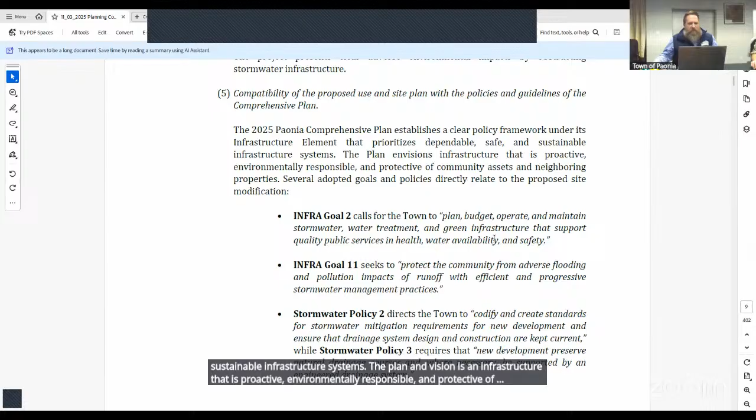Number 5, compatibility of the proposed use and site plan with the policies and guidelines of the comprehensive plan. The 2025 Paonia Comprehensive Plan establishes a clear policy framework under its infrastructure element that prioritizes dependable, safe, sustainable infrastructure systems. The plan envisions an infrastructure that is proactive, environmentally responsible, and protective of community assets and neighboring properties. Several adopted goals and policies directly relate to the proposed site modification.

Infrastructure Goal 2 calls for the town to plan, budget, operate, and maintain stormwater, water treatment, and green infrastructure and support quality public services and health, water availability, and safety. Infrastructure Goal number 11 seeks to protect the community from adverse flooding and pollution impacts of runoff with efficient and progressive stormwater management practices. Stormwater Policy 2 directs the town to codify and create standards for stormwater mitigation requirements for new development and ensure that drainage system design and construction are kept current.

While Stormwater Policy 3 requires that new development preserve natural drainage courses and, where necessary, be supported by an engineered drainage system. The proposed driveway and parking pad would obstruct an engineered bioswale that functions as a shared stormwater management feature, directly conflicting with the plan's commitment to resilient, environmentally sound infrastructure. By disrupting natural and engineered drainage pathways, the project undermines the town's stormwater goals of reducing pollutant discharge, preventing flooding, and coordinating with regional partners such as Delta County and local ditch companies.

Furthermore, the comprehensive plan's infrastructure vision promotes proactive maintenance, preservation of public safety, and design consistency within established residential areas. The introduction of non-engineered private improvements within a shared drainage easement is incompatible with the plan's guiding principles of equitable infrastructure stewardship and neighborhood scale resilience. The proposed project does not align with the 2025 comprehensive plan's infrastructure, stormwater, and land use goals. It compromises established drainage systems, contradicts stormwater management policies, and fails to uphold the town's long-term vision for safe, sustainable, and well-coordinated infrastructure.

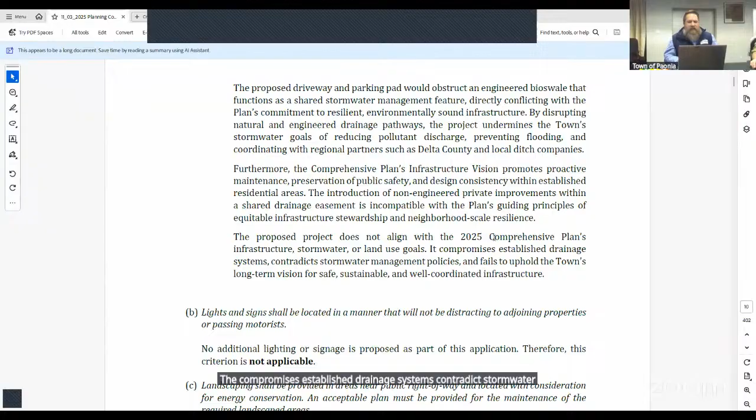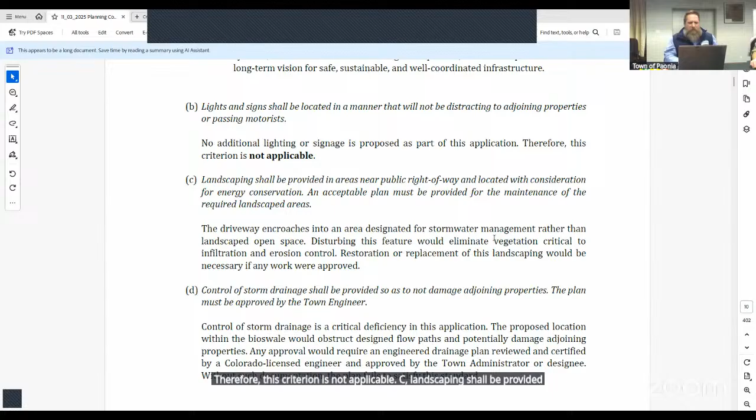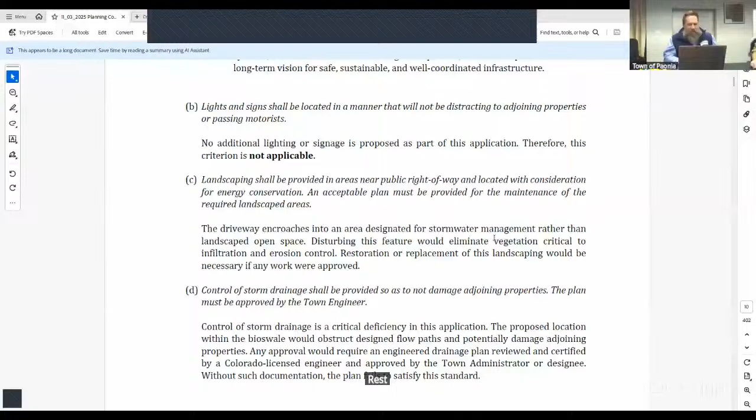Lights and signs shall be located in a manner that will not be distracting to adjoining properties or motorists. No additional lighting or signage is proposed as part of this application. Therefore, this criterion is not applicable. C, landscaping shall be provided in areas near public right-of-way and located with consideration for energy conservation. An acceptable plan must be provided for the maintenance of required landscaped areas. The driveway encroaches into an area designated for stormwater management rather than as landscaped open space. Disturbing this feature would eliminate vegetation critical to infiltration and erosion control. Restoration or replacement of this landscaping would be necessary if any work were approved.

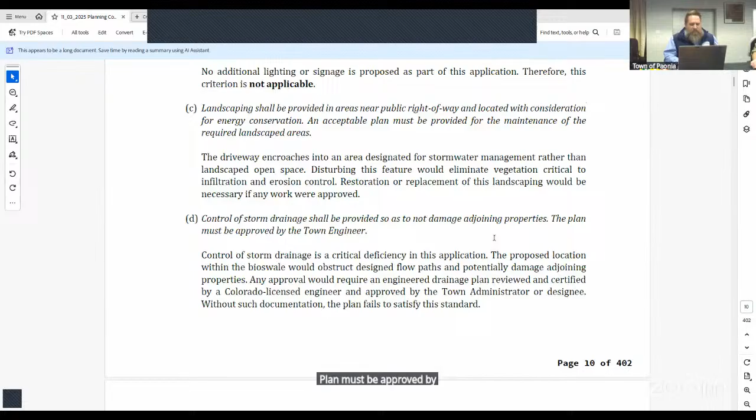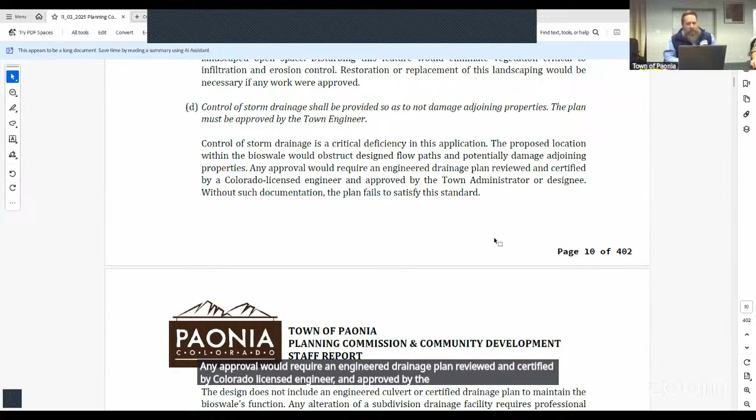D, control of storm drainage shall be provided so as to not damage adjoining properties. The plan must be approved by the town engineer. Control of storm drainage is a critical deficiency in this application. The proposed location within the bioswale would obstruct designed flow paths and potentially damage adjoining properties. Any approval would require an engineered drainage plan reviewed and certified by a Colorado licensed engineer and approved by the town administrator or designee. Without such documentation, the plan fails to satisfy the standards.

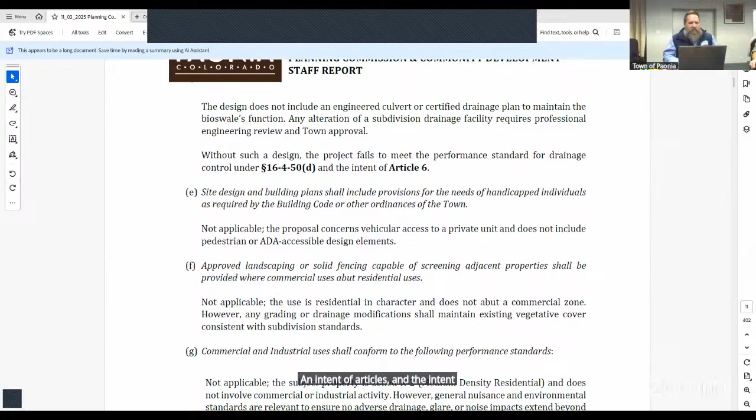The design does not include an engineered culvert or certified drainage plan to maintain the bioswale's function. Any alteration of a subdivision drainage facility requires professional engineering review and town approval. Without such a design, the project fails to meet the performance standard for drainage control under section 16-4-50(d) and the intent of Article 6. Site design and building plans shall include provisions for the needs of handicapped individuals as required by the building code or other ordinance of the town. This is not applicable. The proposal concerns vehicular access to a private unit and does not include pedestrian or ADA accessible design elements.

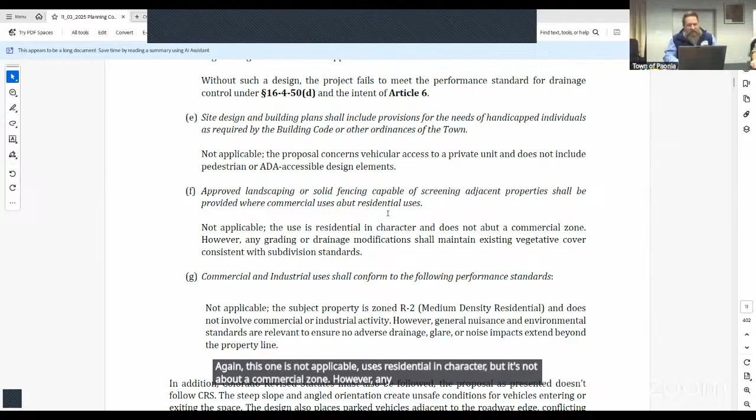Approved landscaping or solid fencing capable of screening adjacent properties shall be provided where commercial uses abut residential uses. Again, this one is not applicable. Use is residential in character, but it's not about a commercial zone. However, any grading or drainage modifications shall maintain existing vegetative cover consistent with subdivision standards. G, commercial industrial uses shall conform to the following performance standards. All of these were not applicable.

The subject property is zoned R2, medium density residential. It does not involve commercial or industrial activity. However, general nuisance and environmental standards are relevant to ensure no adverse drainage, glare, or noise impacts extend beyond the property. In addition, Colorado Revised Statutes must also be followed. The proposal as presented doesn't follow CRS. The steep slope and angled orientation create unsafe conditions for vehicles entering or exiting the space.

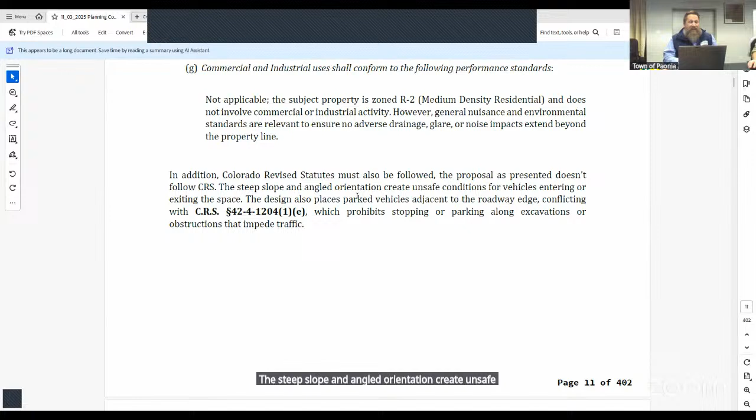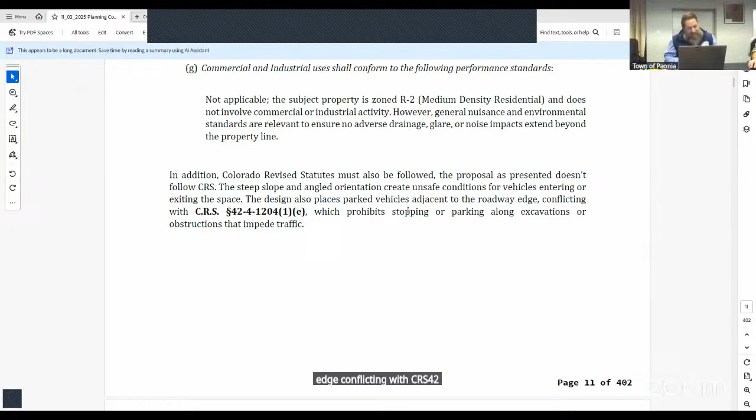The design also places parked vehicles adjacent to the roadway edge, conflicting with CRS 42-4-1204(1)(e), which prohibits stopping or parking along excavations or obstructions that impede traffic. This is a summary of the findings.

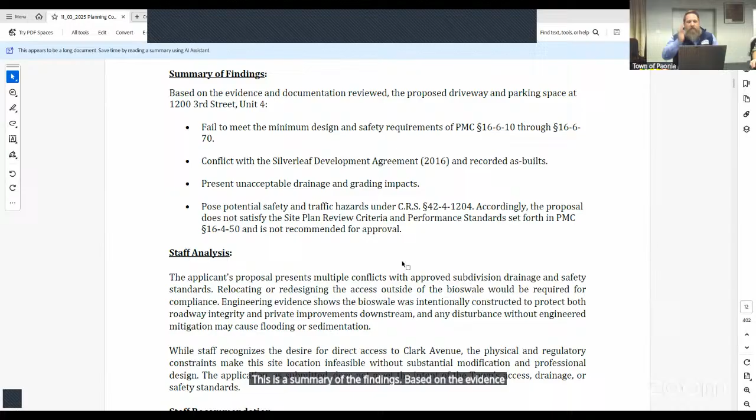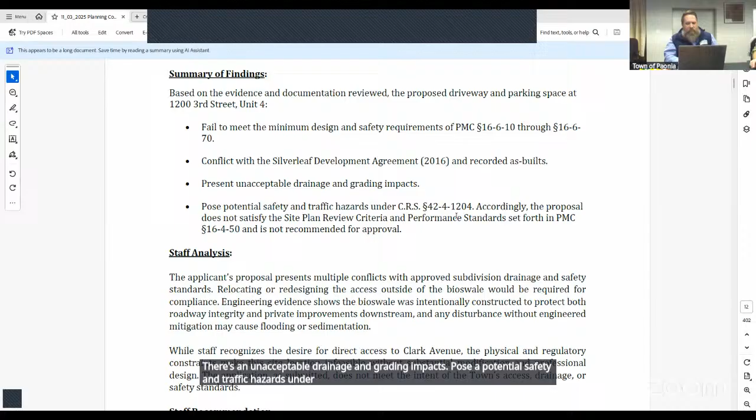Based on the evidence and documentation reviewed, the proposed driveway and parking space at 1200 3rd Street, Unit 4, failed to meet the minimum design and safety requirements of PMC Section 16610 to Section 16670, conflict with the Silverleaf Development Agreement and recorded as-builts, present unacceptable drainage and grading impacts, and pose potential safety and traffic hazards under CRS 42-4-1204. Accordingly, the proposal does not satisfy the site plan review criteria and performance standards set forth in PMC Section 16450 and is not recommended for approval.

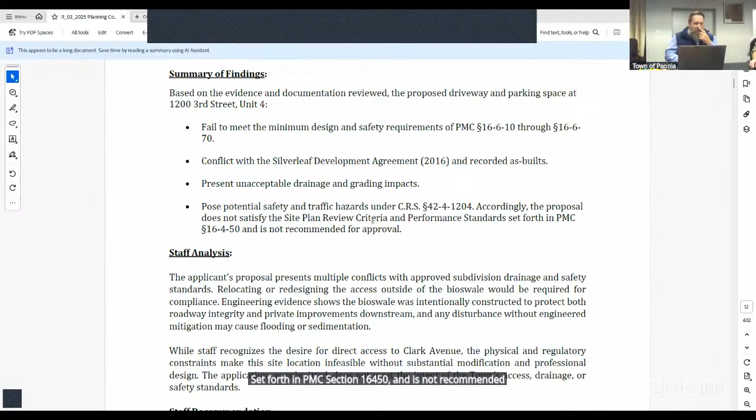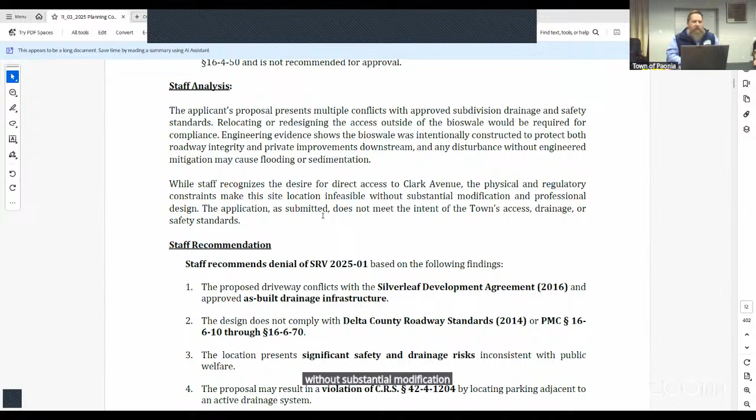Staff analysis. The applicant's proposal presents multiple conflicts with approved subdivision drainage and safety standards. Relocating or redesigning the access outside of the bioswale would be required for compliance. Engineering evidence shows the bioswale was intentionally constructed to protect both roadway integrity and private improvements downstream, and any disturbance without engineered mitigation may cause flooding or sedimentation. While staff recognizes the desire for direct access to Clark Avenue, the physical and regulatory constraints make the site location infeasible without substantial modification and professional design. The application as submitted does not meet the intent of the town's access, drainage, or safety standards.

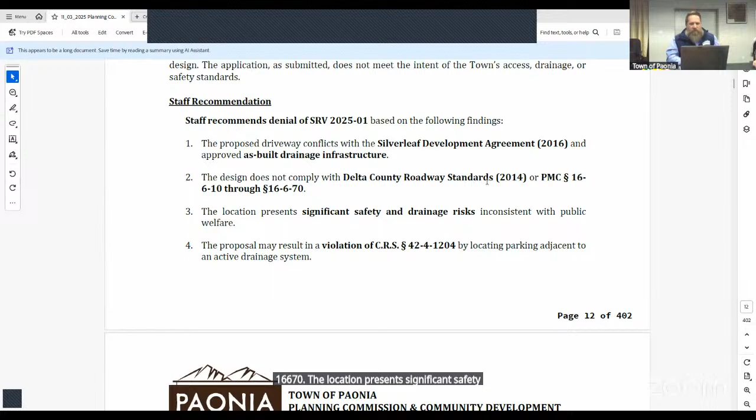So we have two recommendations here. Staff recommends denial of SRV 2025-01 based on the following findings. The proposed driveway conflicts with Silverleaf Development Agreement 2016 and approved as-built drainage infrastructure. The design does not comply with Delta County Roadway Standards or PMC Section 16-6-10 through 16-6-70. The location presents significant safety and drainage risks inconsistent with public welfare, and the proposal may result in a violation of CRS 42-4-1204 by locating parking adjacent to an active drainage system.

We do offer an alternative or conditional approval if granted by this commission. If the planning commission determines the request may proceed, staff recommends conditional approval subject to the following minimum requirements. One, an engineer's design. A licensed Colorado engineer shall prepare drainage and access plans, verifying that stormwater capacity and roadway safety are maintained. Two, culvert installation. The engineer shall design and size a culvert adequate to preserve the bioswale's function. Three, perpendicular alignment. The driveway must be realigned to intersect Clark Avenue at a perpendicular angle.

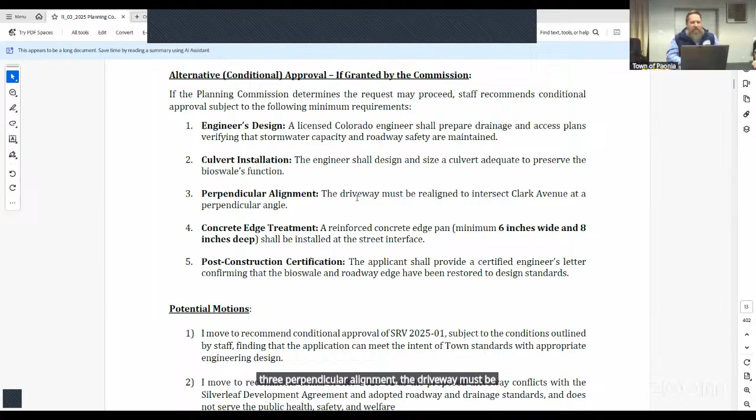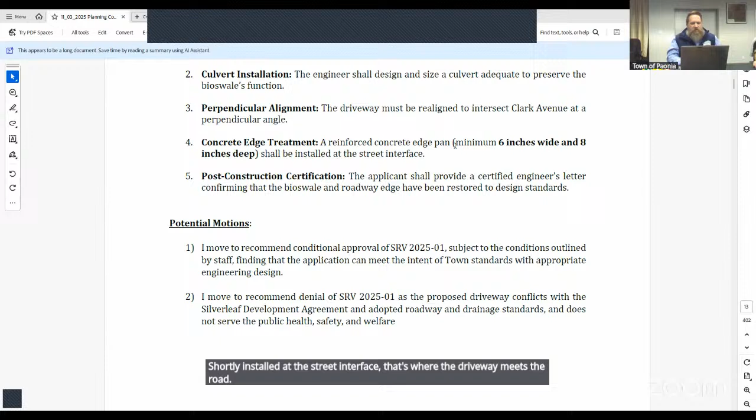Number four, concrete edge treatment. A reinforced concrete edge pan, minimum of 6 inches wide and 8 inches deep, shall be installed at the street interface. That's where the driveway meets the road. Five, post-construction certification. The applicant shall provide a certified engineer's letter confirming that the bioswale and roadway edge have been restored to design standards. And then there are two potential motions. That's it. Okay. Staff report. Are there any other comments? Obviously not.

Okay, the applicant presentation. Would the applicant or the applicant's representative please come up to the podium and state your name and address for the record and take the oath? Okay, good evening, everyone. Wait a minute. Do you swear to tell the truth in this matter? I do. All right. Continue.

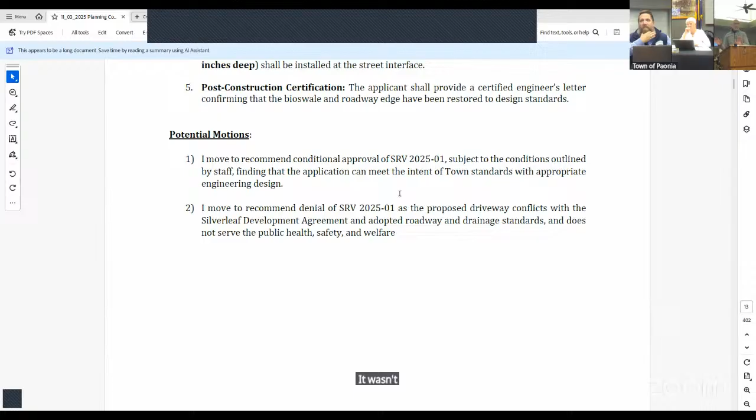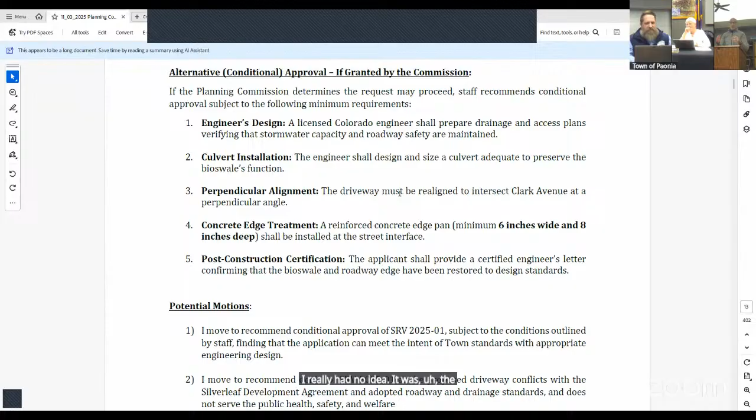Good evening. Let me say to begin with, it wasn't my intent to be such a scofflaw in all this. I really had no idea that the proposal was so completely out of compliance, and I acknowledge that it is, so I apologize for taking your time with that. What I do want you to know is that I've retained Jeff Rupert, who was the engineer who did the civil design work for it all. And I met with him this afternoon, and he's prepared to do a proper design that would meet the alternative path that has been outlined here.

So I don't want to try to defend the original proposal at all. I recognize it was inadequate and inappropriate, and that a proper engineered proposal needs to be done. And I'd like to ask for the opportunity to do that. So that's really all I have to say. Okay. Anything from town staff? Is this the rebuttal?

Yeah. Okay, yes, that was the information why Commissioner Hunter couldn't be here. She's had to recuse herself after her husband was retained, which is completely understandable. And it would make sense that if this were the path to go and this alternative conditional approval were to be considered tonight, one of the motions could be to, what's the word I'm looking for, Ruben? Table? Not table, because you can't table this. Conditional? No.

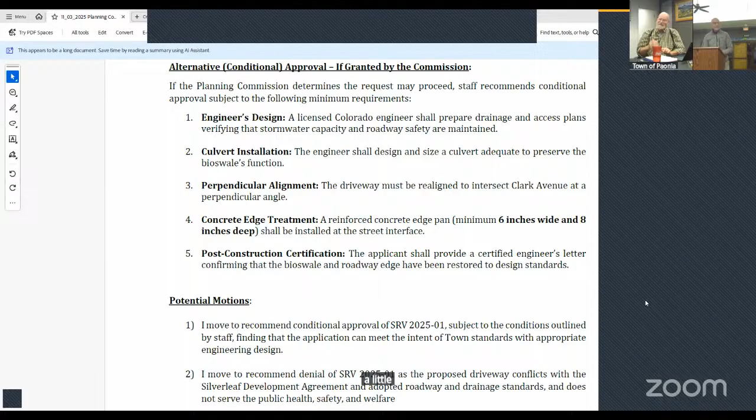be rushed. One of the things, unfortunately, I have a little knowledge just because I've lived here, and there are utilities in that swale. That's right. So I forgot public comment. So we need to do public comment. I jumped. So utilities have actually been marked. They're marked right now, for a different reason. But you're absolutely right. There are utilities.

Okay, well, I'm gonna ask you to sit down and we're gonna take public comment. Thank you. All right, I will now open the public comment portion of the public hearing. Any speakers, please clearly state your full name and address for the record, speak from the podium, and wait to talk until you get sworn in. Does anybody want to make a comment? Yes, sir. Reed Hunker. I'm in unit number 3, right next door to the north. Okay. Can you swear to tell the truth in this matter? Absolutely, yes.

Everything that was mentioned here answered my questions. So I really don't have any other comments other than we were thinking about possibly expanding the existing 2-car guest parking where it's flat, right outside of unit 3. We're thinking about adding one more to the right of that, so that would be 3 guest parking places there, and then have a crusher fine path going to 4.

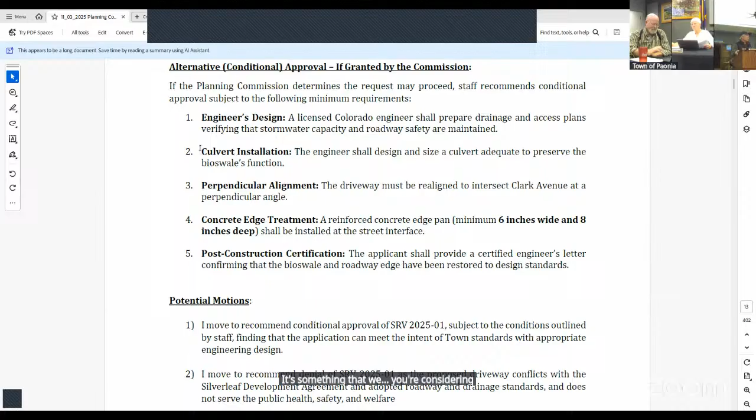Something that we're considering providing as a board, because parking is at a premium, as we know. But those would be all grouped together. And that's basically it. Thank you very much. Anyone else like to make a comment? Okay, seeing none, I will now close the public comment portion of this hearing. All right.

Before we turn to the commissioner questions and deliberation, I want to state that the documents included as part of the record for this public hearing include all the application materials submitted by the applicant, all materials included in the packet, all written referral and public comments received during the application, the notice of hearings, and the town's ordinances, as well as Colorado revised statute and the homeowners association from the Silverleaf. Does anyone have any objection to the inclusion of these items in the record? No? Okay, seeing none. Trustee or commissioners, who would like to begin?

Obviously, you still had something to say, Mr. Still. That area has utilities in it, and the utilities would have to be relocated so they're not more than the stated depth if you put fill in there. I believe it's telephone and also an electrical goes through that area, as I recall, as it was being built and I drove by.

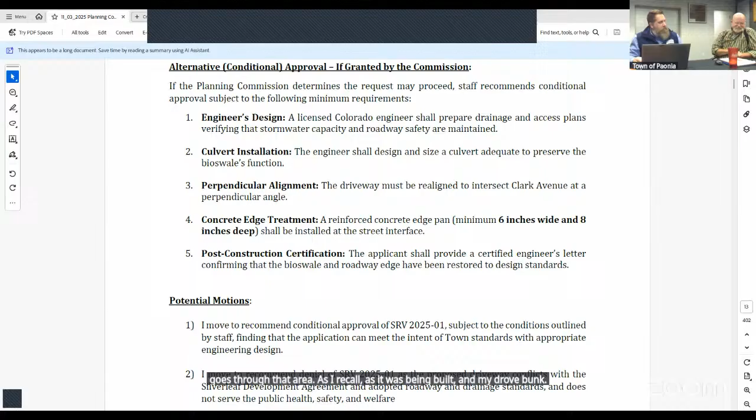That's a pretty serious thing. We can't go burying it 5-6 feet deeper than it is now. We have a short distance for a reason. It would have to be lifted then. And I'm sure that Jeff will be very conscious. So, as far as that goes, anybody else have anything?

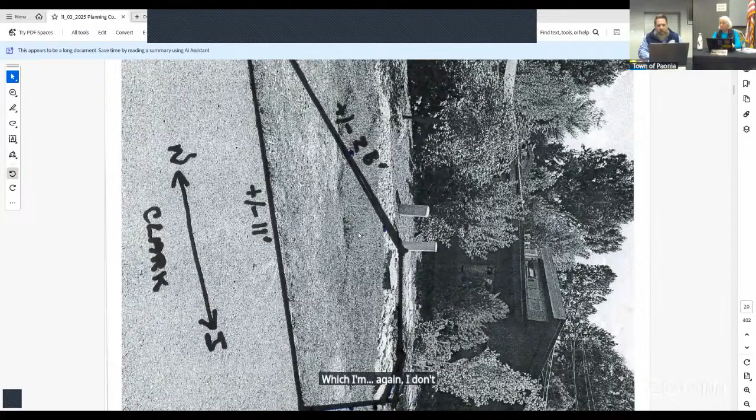I was curious, if you look at exhibit A on page, hang on, hold on, page 20. The first thing I noticed is the 2 columnar units sitting right by the edge of the drawing, which I don't know, but are those utilities? That's gas and it's telecommunications. Yes, telecommunications.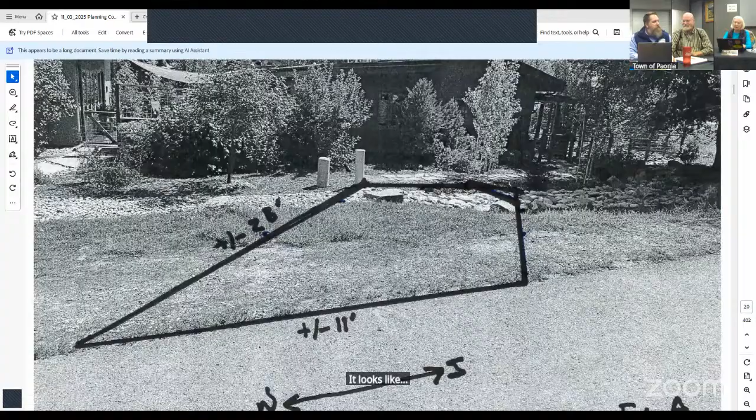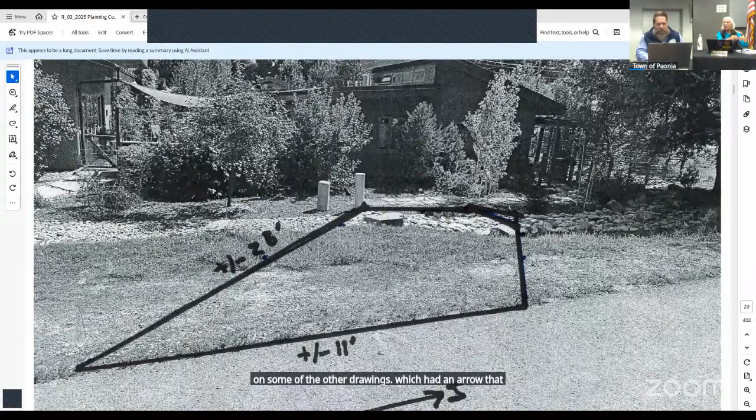It's internet, it's fiber. Okay, and then I couldn't tell what the square box appears to be in the uppermost corner in the photo. It looks like it's a flat rock. It's a rock. Okay, so when I was looking at the drawings, the reason you've gone this way is because there were 2 squares that were highlighted on some of the other drawings, which had an arrow that said parking. And it looked like this was designed to avoid those 2 highlighted in yellow rectangles.

And what page is that on, Rick? You found it? Yeah. Page 24. So there we go. So your drawing is angled to the south. And then it looks like it's to avoid those 2 rectangles, sorry. Got my geometry wrong. And I didn't know what those 2 rectangles actually are that are highlighted in yellow.

Just let me point them out to make sure. Yes, please, that'd be great. Right, on the drawings that were part of the development agreement, that was where 2 parking spots were shown to be. On original drawings, during construction, I think because of the slope there, they moved the parking area down to where the blue area is. Recognizing that's not to scale, I sketched those in, but the two rectangles were the originally designed parking spaces that were not built.

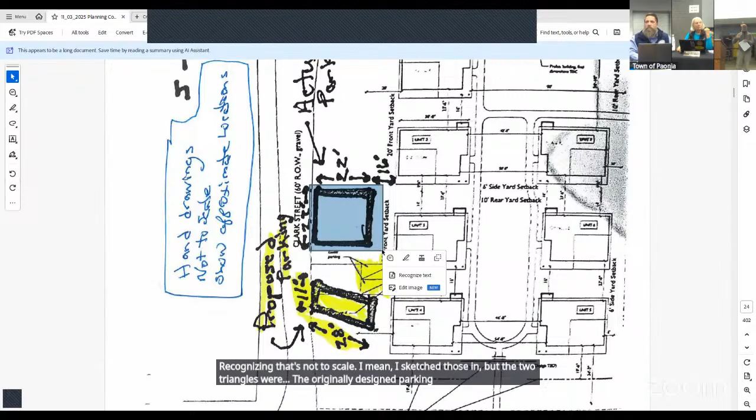So can you then tell me why you've proposed to do this parking spot at an angle? I don't understand why you're not doing it perpendicular. You know, it's kind of a long story. Originally, I thought it would be more in this way because this is a steep drop off. And it was to avoid that steep drop off and I thought it would be an easier approach. There'd be less disturbance. I recognize now that's inappropriate.

And I frankly don't think it's gonna be a problem dealing with that steeper drop off after talking with Jeff Rupert. He didn't seem to be concerned about that. And in some respects, I agree it would be better for it to be perpendicular to Clark. Yeah. Well, and I wondered if you drew it deliberately to avoid the two yellow rectangles, because they really did have some presence on the ground, but they don't. Okay.

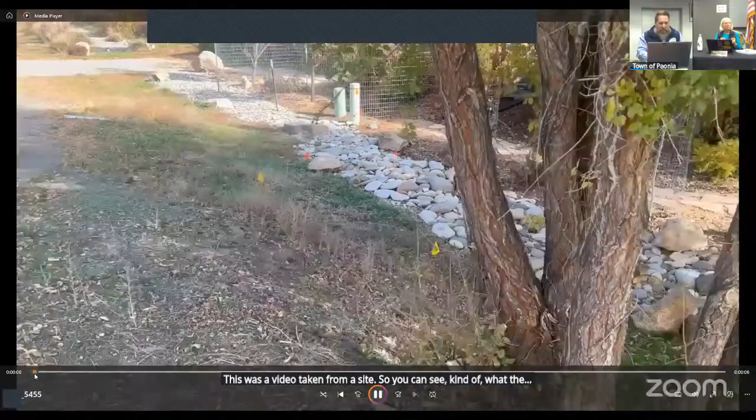Anything else? I might as well show you this since you were asking. This was a video taken from the site, so you can see kind of what the... Well, there are the two utility poles. Yeah, it looks to me like you don't have enough room without hitting those poles, those two standpipe things. It's what it looked like in the drawing too. I mean, it could be an optical illusion.

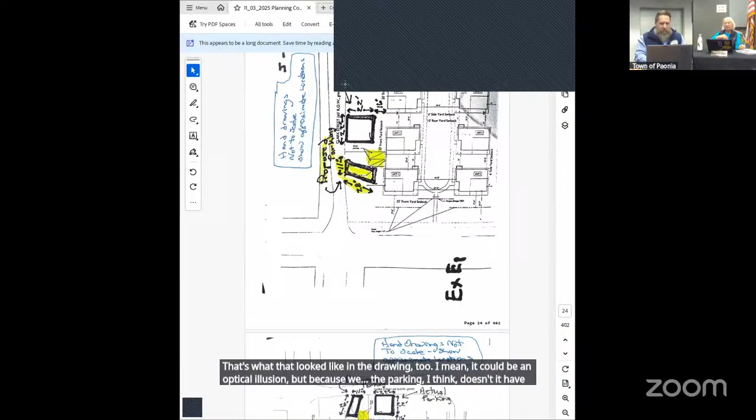But because the parking, I think, doesn't it have to be 19 feet long? Our code requires a certain configuration for parking. It has to be a minimum of 19 by 9 or something. I'd have to go back and look, but these are the things that an engineer would do. Right. They also take into account any existing utility conflicts and design something around that.

Well, I guess what I'm asking is, the engineering is all really good. But if you can make sure that what Jeff is looking at meets our code as much as possible, so that you're not having to ask for a variance, let's say on the size of the parking space. Because the sections of chapter 16 mentioned in the report, that's where the specifications for the size of the parking spot are. And this met it and exceeded it.

But it seems to me if you're going to go back to the drawing board, I would ensure that as much of what we already require is presented. Because then you may not even have to come to the planning commission, honestly. You might have to because of the swale, because of the drainage, okay. But if you can minimize the questionable pieces, it makes it easier on everybody.

Yeah, when I first saw this and was reading through it, the slant of the parking would really bother me, especially since most people coming in would come in from the south to the north, and this is canted in exactly the opposite direction, so it would make it very difficult to get in and get out and not impede traffic, as well as the big drop off. So the fact that all those things could be addressed by an engineer and done well and minimize all the issues would be good.

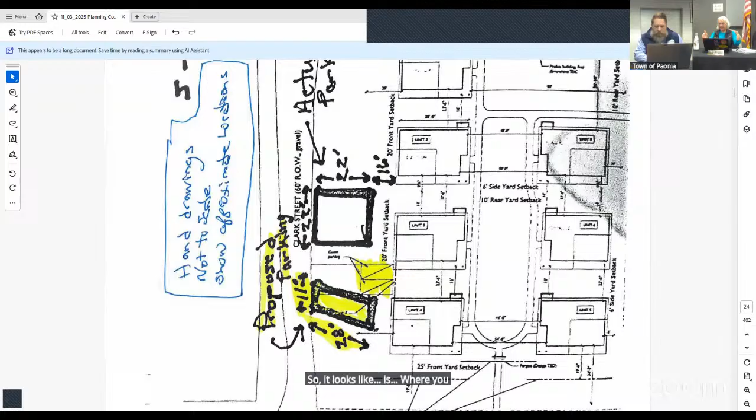Can I ask, I know where the existing parking is, just from walking to the bakery enough. So it looks like this is where you would currently have the designed parking spot, which is on the original plans, which is next to your unit, I believe, Reed.

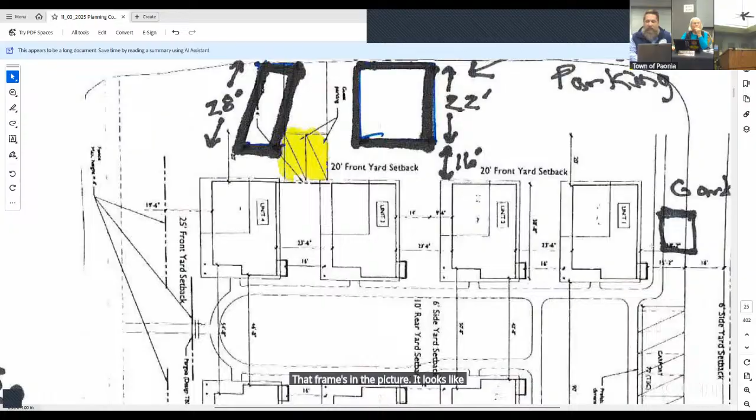And so would expanding it to include one more space, would you be dealing with the same issues with drainage? You mean it might avoid a lot of the drainage issues? I don't think there's a drain there. That drain that's in the picture, it looks like the drain continues in front of our house, but that was just a fake drain we put in to make it look like the rest of it. Oh, okay. And it's relatively flat, but we still have to maintain a swale for the water coming from the south to get to the next drainage, which is just past our house.

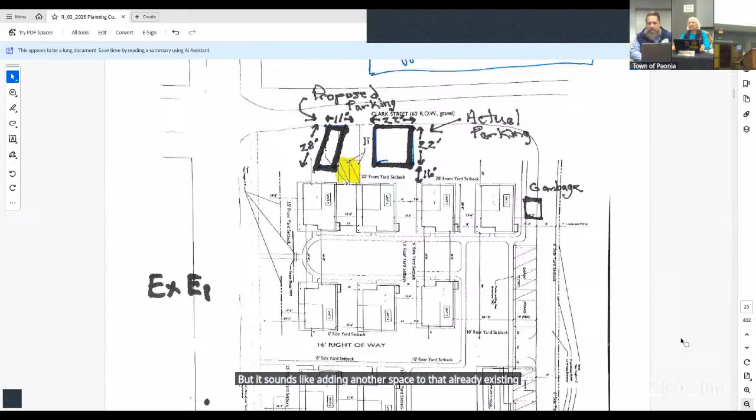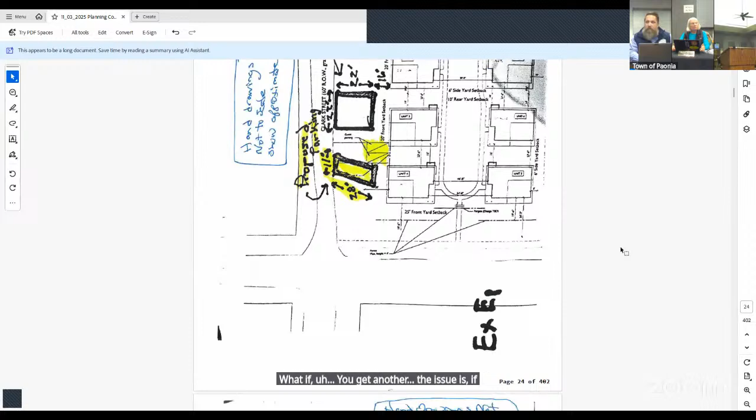But it sounds like adding another space to that already existing two parking space might have less engineering needs. It would definitely have less engineering. The issue is, if I can point it out, is that there is already an EV charger on the house. The previous owner used this area to park and to charge his vehicle, and so my initial thought was, well, I'm just gonna be improving what's already been approved. I didn't know that none of it had been approved.

And so the dilemma that you point out, you could add another spot down here, but then the EV charger would not. Well, the EV charger could be moved. Put it on a pedestal, right? That would present a whole nother area of problems, with easements and putting a charging station on property that is in joint ownership. Right. So that presents an issue.

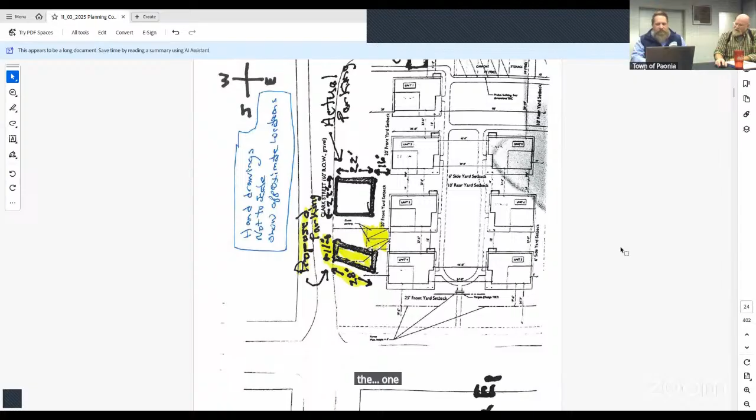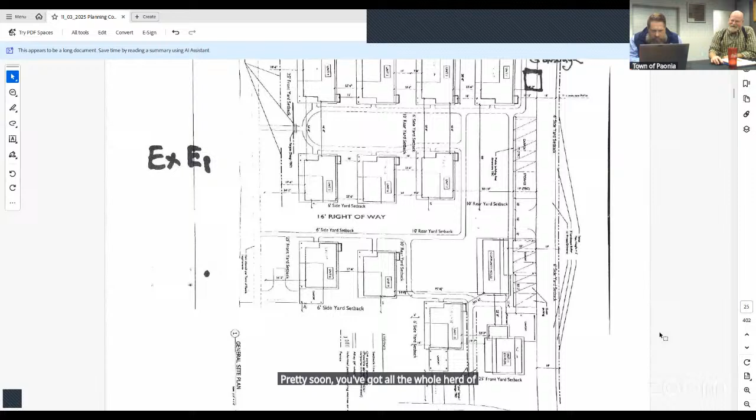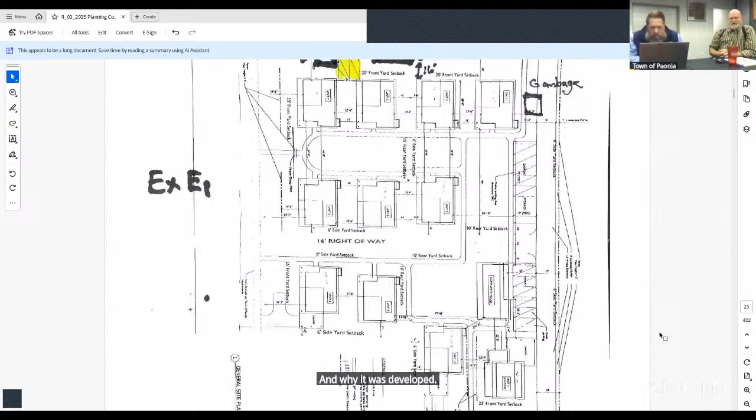As I recall, when this was approved way back in the dark ages, one of the reasons why it was presented and brought to the town was that there would be very limited parking in that area and that there would be limited traffic. And this is kind of letting the camel get its nose under the edge of the tent. Pretty soon you got the whole herd of camels in your tent. It really takes away from the planned unit development and why it was developed. It was developed as a limited access.

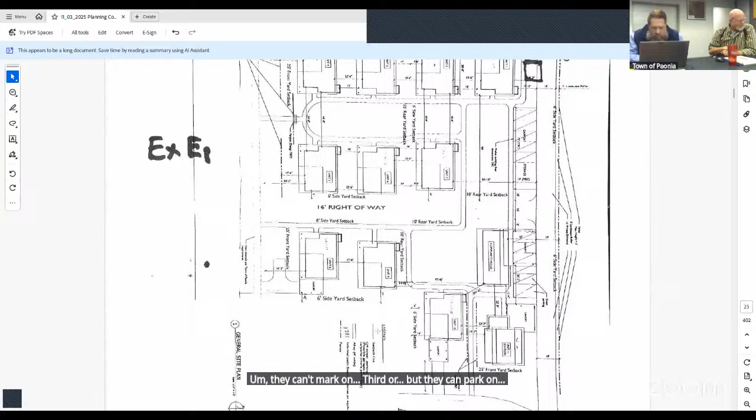And guest parking is great, but they can park on the street. They can't park on Third but they can park on, not Clark, Minnesota. Oh, Minnesota, yeah. Where it turns into the subdivision. There is adequate space there for parking on the sides. And it's on the other side of the development, I understand, but that would be the logical thing for guests to do. It's only temporary and it eliminates this whole process. I think this may be a bit more expensive than what you would like to do.

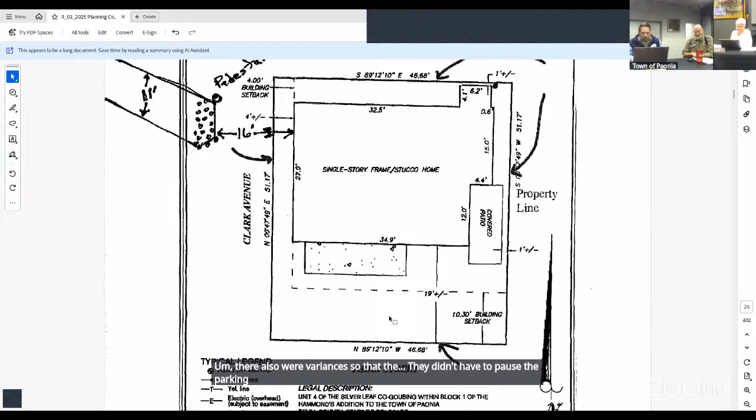There also were variances so that they didn't have to pave the parking lot, and that may have to go away as well as part of the deal. It was mainly to keep the costs down for senior co-housing. I understand that it didn't happen that way. The housing got to be extraordinarily expensive, but the plan was this would be affordable housing for seniors.

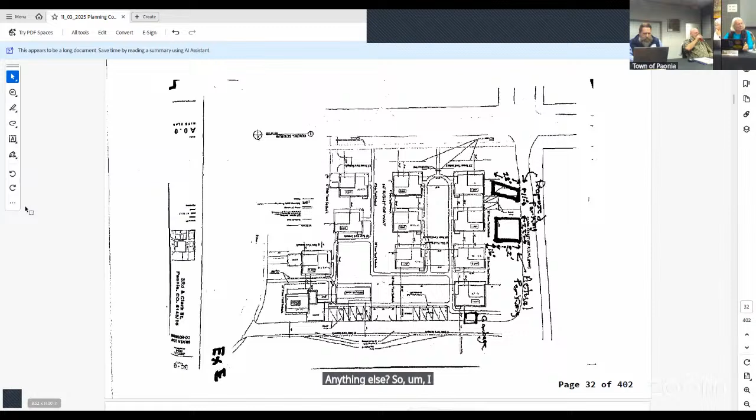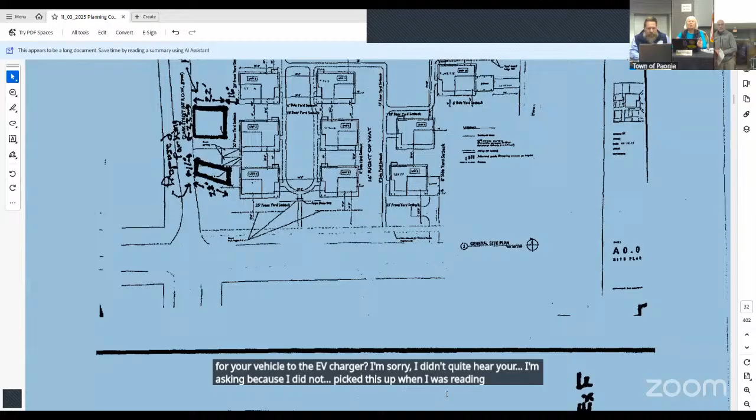Anything else? So I'm not sure I knew there was an EV charger that the previous owner in number 4 had put in. Is that your motivation for wanting to put in the parking space, to have access for your vehicle to the EV charger? I'm sorry, I didn't quite hear you. I'm asking because I did not pick this up when I was reading the packet. Is your motivation so that you could have a vehicle plugged into that existing EV charger? Is that really more your motivation than just additional parking?

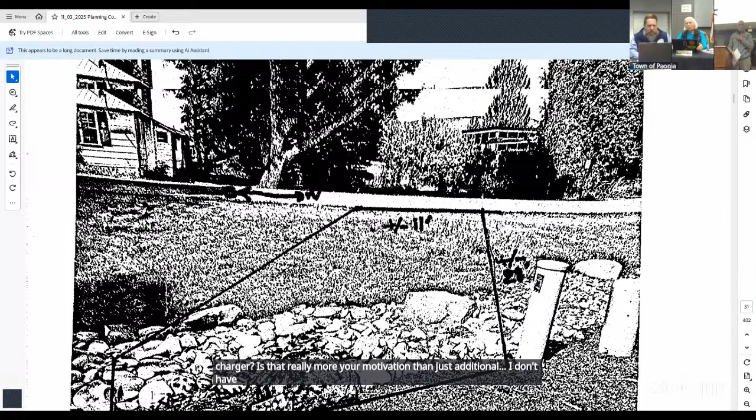I don't have an EV myself right now. It is a piece of the puzzle to have it. It would be a benefit to me to have it there and available, clearly. I think it could also be made available to the rest of the development as well. There's another EV charger next door. I don't know if it's made available to other visitors, but I'm prepared to do that with this EV charging because it's a guest spot. So you'd have to figure out how you charge someone to do it, but that's perfectly okay. So that would be another addition, a benefit, it seems to me, to the community.

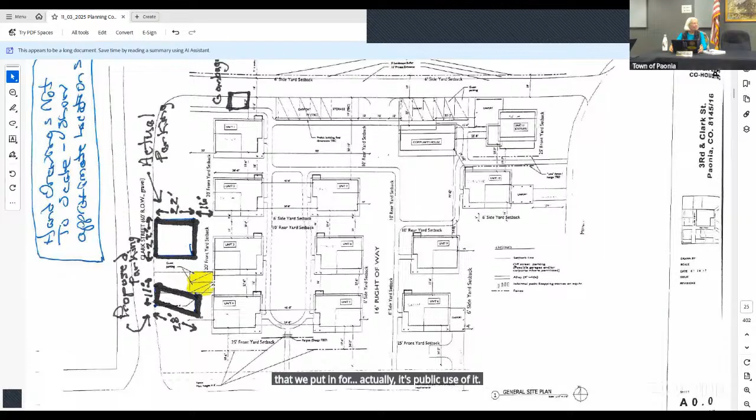I have another question. It might be that Reed would answer it, if I can, it's an electrical question. I know there's solar panels in the back of the property. Is this off the grid or are those solar panels just augmenting? Okay. And there's an EV charger back there that we put in that the public can use. Oh, okay. It shows up on the EV map, and you put in a credit card or whatever. Thanks.

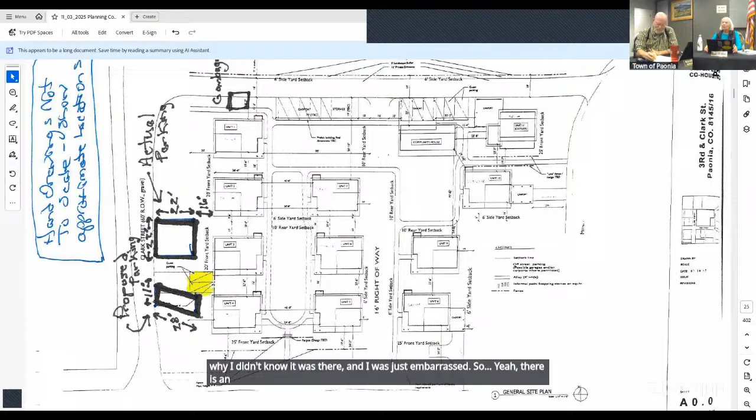I didn't see it on the map. Thank you. I was looking for it. It didn't show up, so that's why I didn't know it was there and I was just embarrassed. But yeah, there is an EV charger back there, okay, a dedicated spot for that. Okay, any other questions or comments?

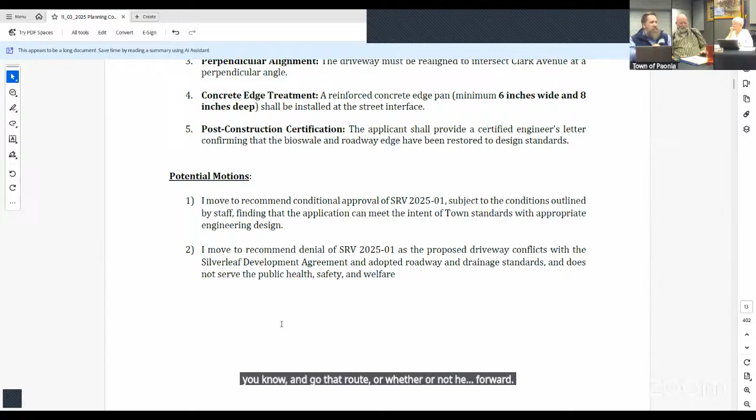I do want to say that our intent is not to design it here. That's for the engineer, and it's really up to the applicant if he would like to move forward and go that route, or whether or not he will. So, it sounds like he's already engaged an engineer to start moving forward, so it sounds like we're going down that path of wanting to do what's necessary to obtain it.

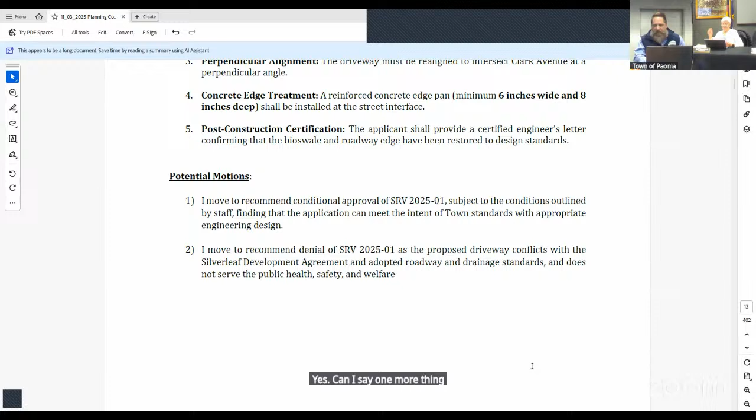I'd like to make a motion. I think I have it, okay. Yes. Can I say one more thing? Yeah. So, we have a motion, we have 4 things that the staff found. So here's my question. If Mr. Cook goes ahead with Rupert and does all the engineering, I don't know that necessarily means that it's approved.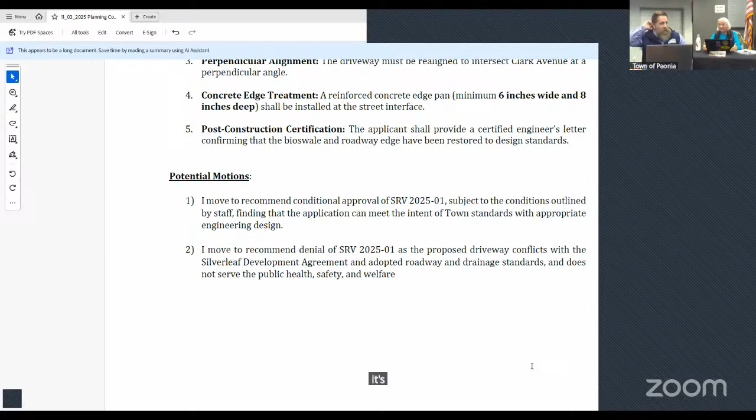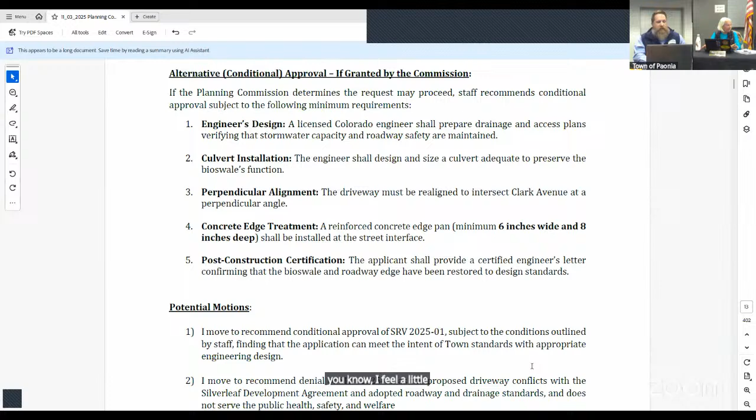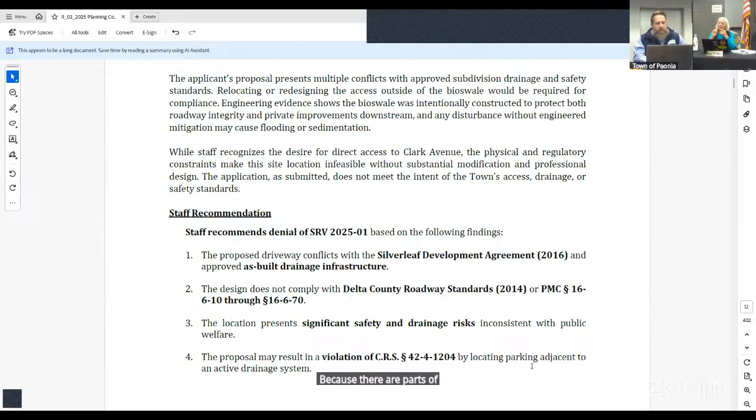I mean, that's why it's putting us in a really odd position here. I feel a little bit in an odd position. That if we say, yeah, go ahead and spend the money, bring it to us, that doesn't mean it's gonna get approved. Because there are parts of your plan that, unless they're well addressed, like the drainage, we would need to be convinced that you have addressed every one of those original agreements that came with the development and the things that Rick was discussing.

The intention was not to have a lot of cars there, a lot of traffic. And I know the people that lived across the street, they've since moved. That's why there's no parking on the west side of Clark, because those people were really upset because they were promised no traffic and there was traffic. And that really came about when, no fault of the people in Silverleaf, the Quonset hut became a restaurant in various iterations, and there was a lot of traffic.

I was one of them eating pizza. They had a pizza oven. They had really marvelous, it was like the beginning of cottage industry dinners. So there was a lot of traffic. So those folks had moved, and they moved because they were upset with the traffic that came in that they were told wouldn't be there.

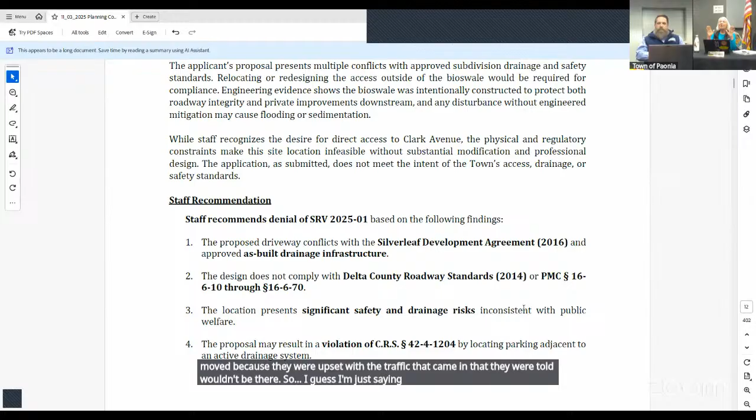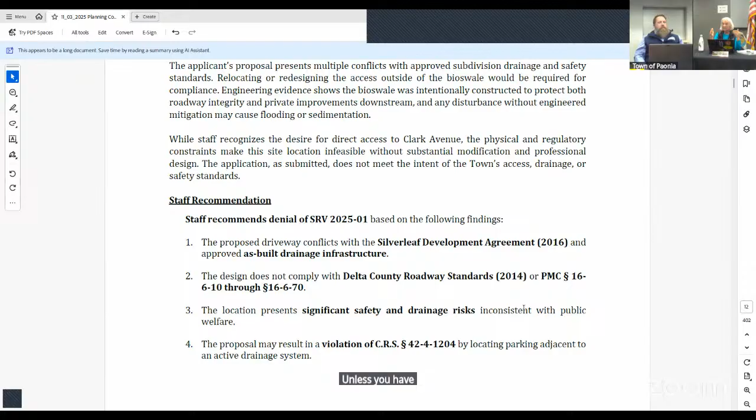So I guess I'm just saying, I would hope, and if I can say this, I think it'd be really good if you got with Stefan to be sure that if you're going to spend the money to get this engineered, that we don't come back with the same questions or more. Because we can't guarantee we'd approve it unless you have really, the best thing you could do was create this in such a way you don't need a variance or you don't need a special review. But it's

Oh, it is? So I didn't know that. So it would have to go to the city. Oh, I'm sorry, I didn't know that. And why is that? Because it's a planned unit development and any changes in a planned unit development have to go through the special use review. Okay, because we're amending the agreement from 2016. This is contract. That kind of makes my point even more.

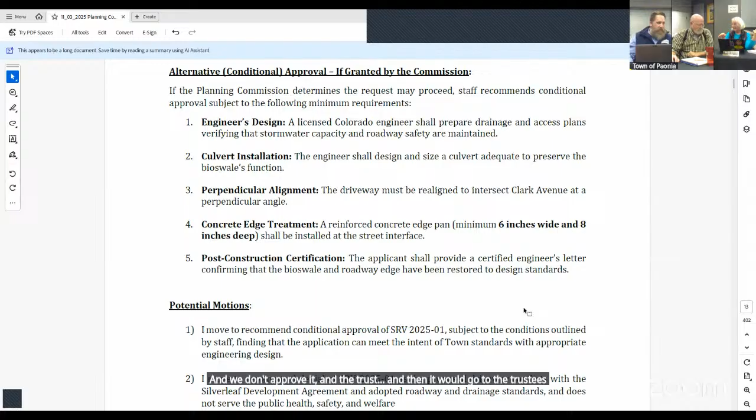That you really want to make sure that what you're doing is approvable. I mean, you could spend all this money and we don't approve it, and then it would go to the trustees, right? It would. And I feel like we're in an odd spot, you know?

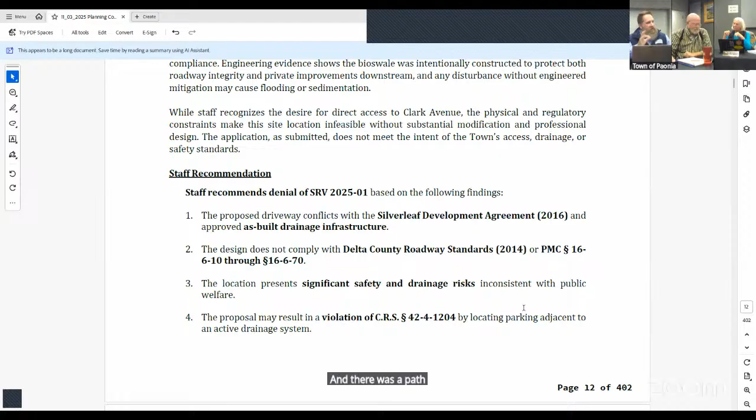So there are 4 reasons for that denial, based on the review. And there was a path forward based on what was found to be deficient in the application that would give a pathway for approval, should the board meet in the affirmative. And if we were to start looking at what it would take, again, public hearings could go any way based on testimony that's received.

So no matter what, even if this were open and shut, there's never 100% chance that any special use review is gonna be approved based on public hearing. But if we look at the 5 criteria for that alternative conditional approval, we're not saying go do this and we're gonna give you an approval. We're saying these are the things that we would need to have answered for us to hear it again, if this were continued.

And I agree, I think those 5 things are good, but I'm concerned about these utilities, and that did not come up. That could be number 6. So there are 6 different things here for a condition of approval. And if we said, okay, we really want to know about utility conflicts and make sure that there aren't any, that would be something you would say, but we wouldn't be using either of these motions if we continue.

Right? There would be a third motion that would be made to continue this to the first meeting in March, which is March 2nd. And that would give enough time for all of those to be answered. What we could say is, we'd really like to have those questions answered, those 5 questions, with the addition of a 6th for utility conflicts. Okay, so, I mean, that's a good question. With fiber right there, you don't want to hit fiber.

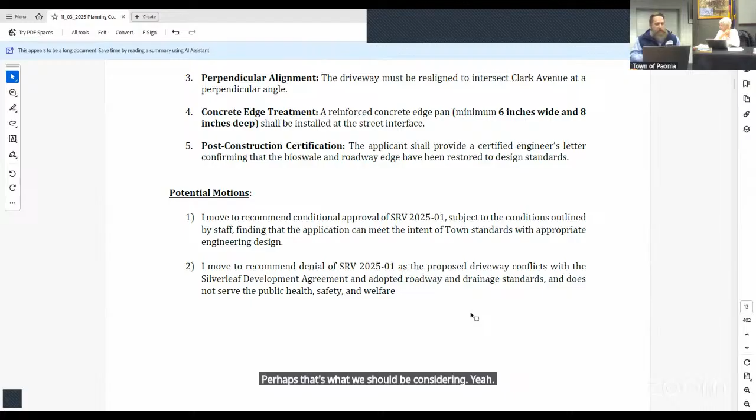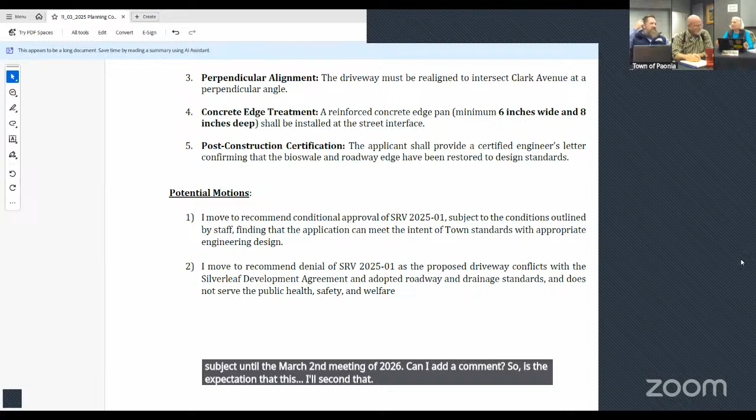Yeah. So I'd like to make a motion to continue this subject until the March 2nd meeting of 2026. Can I add a comment? I'll second that. Thank you. Yeah, we haven't talked about publication and public notice. So is the applicant going to have to, they will not have to start over? By continuing it, we don't have to go and do a renotice. What we'll probably do is post it again like we did, it's a sandwich board in front of the unit, as we get closer to that time.

Even with as much change in the application, you really don't think we have to do a publication again? What about mailing? Well, first of all, we never learned, did anybody protest? Were there any letters of protest to this? No. Okay. Okay, all right, if that's gonna work. Yeah, and we can verify that as it would get closer to time with our town. Well, it sounds good, because I hate to make this person pay it all over again. But I thought we better make that clear tonight. And that's why we were going down the path of continuing.

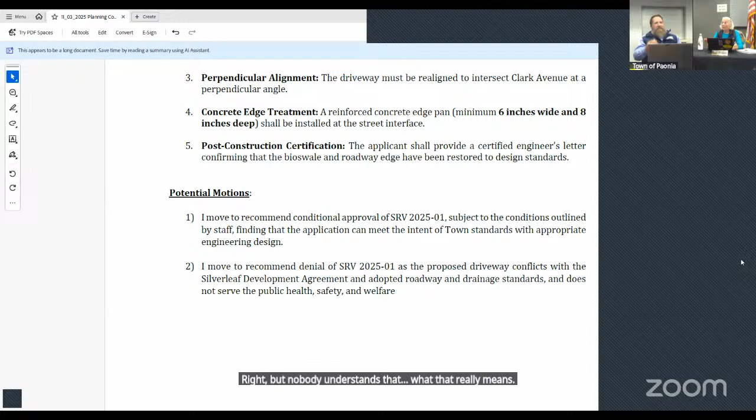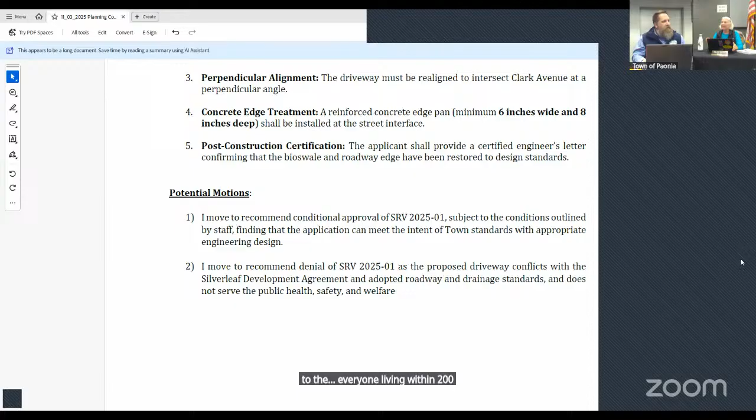Right, but nobody understands what that really means. I didn't know. Yeah. I didn't know continuing meant it wouldn't have to go to another hearing, so that's why I wanted that to be clear. It will come back. I mean, going to publication, it doesn't have to go in the newspaper, it doesn't have to be remailed to everyone living within 200 feet. Right. I wanted to verify that. Okay. All right, we have a motion and a second, further discussion? All right, all in favor?

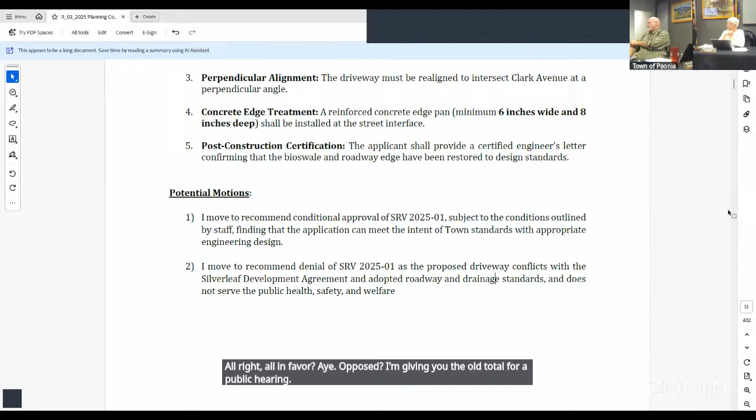Aye. Opposed? Oh, do we need to do a roll call vote for a public hearing? There's 4 of us. Okay, we all said aye. All right, motion carries. Okay, motion carries, so that's it, the hearing's over, right? Hearing's over, I don't believe we had any more agenda items or anything. I should adjourn. I'll second. All in favor? Aye. All right. Meeting is adjourned, thank you everybody for showing up.

Thank you. Welcome to the complexities of municipal government. Yes. Very good, thanks for doing that. Thanks for your time, guys. Okay. That was a lot. Yeah. That's a lot. Any HOA meetings like that? So long, I just had to show up. Yeah, the whole time.

Another date. March second. Okay. Will you be back? Should we move to the next meeting? We've already said it. Well, I thought we were okay with March second. Oh, yeah. If you can attend by Zoom, and I would have Jeff attend as well. Okay. Will that give you enough time? I might be in an airport on March second. Oh, okay. That's Monday. Well, let me see what I can do.